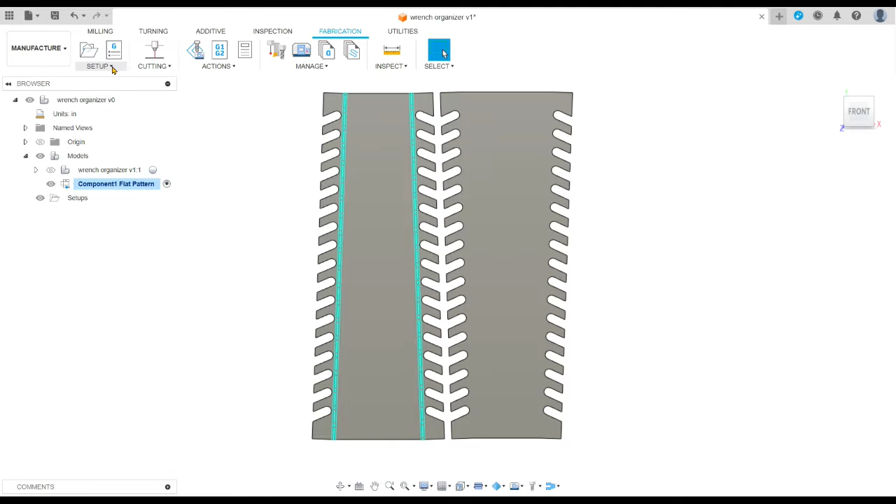You'll left click on setup, go to new setup, and it brings up this box, and you can see the X and the Y, and this is our models. So you want to go down here to where it says model on the right hand side in the dialog box, hit select, and then select both of those models.

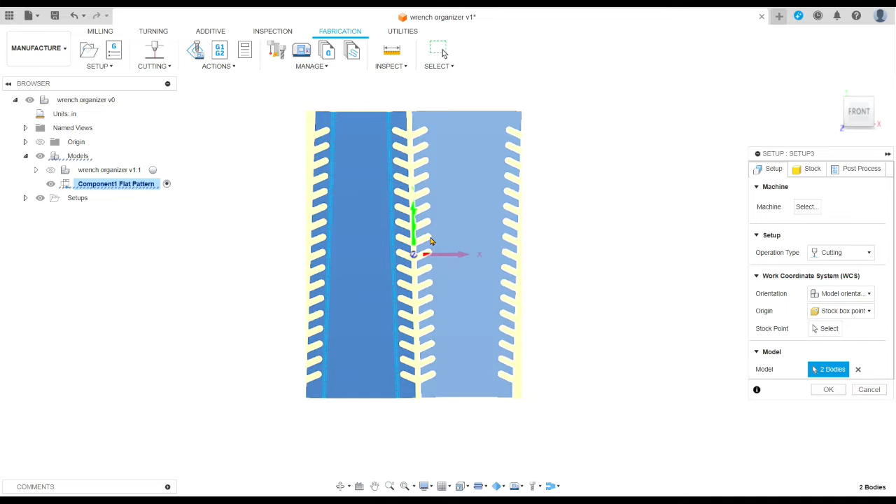And then from there, this is our XYs. Now that is where the tool is going to start, where you set up 0 on your machine for where your cutter starts. And we want that to start on this corner. That's where we like to start. It makes it really easy to manage our material when we start always in the lower left corner. So once we have that set up, we hit OK.

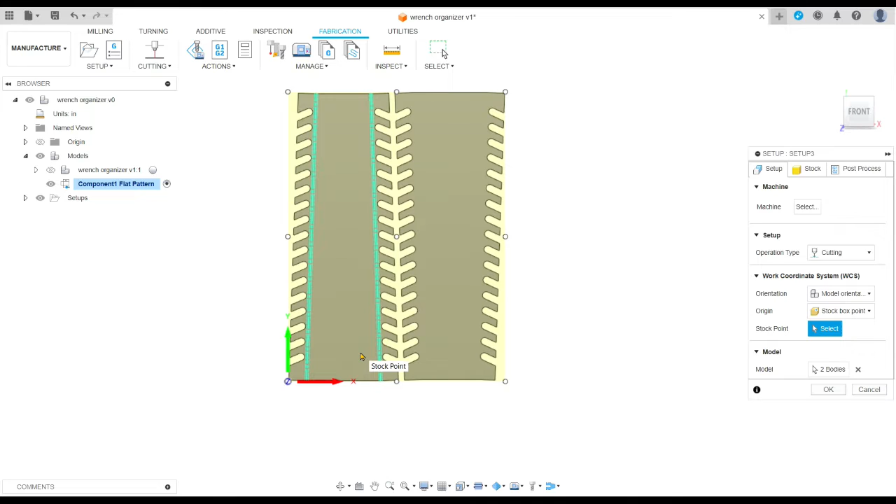And then we go to cutting. We're going to left click on cutting, go to 2D profile, and it'll bring up this dialog box. I'll bring it over here for you. Now here in tool, that's where we want to hit select. Now it's going to bring up this other menu. You can see I already have 14 gauge fine cut selected. I'm just going to go ahead and delete that.

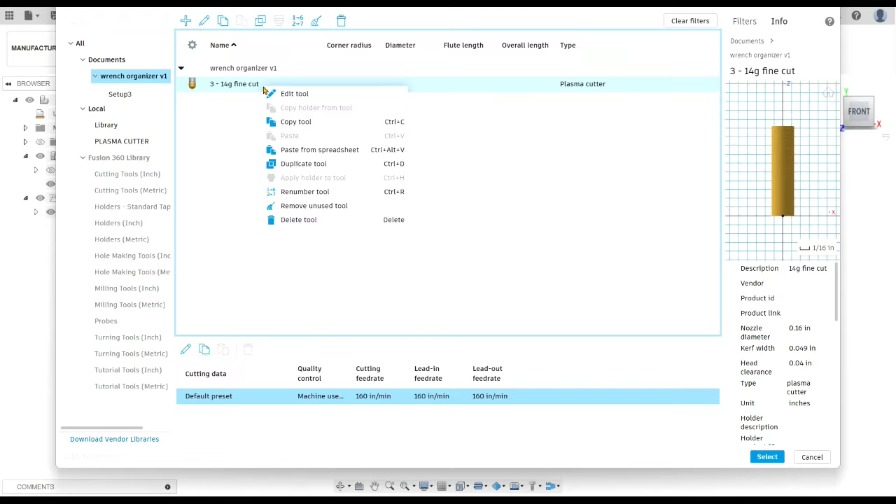Delete. Okay, so over here on the left, you'll see where it says local. You want to right click on local, and it'll say new library, new folder. I want to make a new library, so you left click new library, and then you can name it whatever you want. We'll name this YouTube cutting, enter. Now, we already have our library for plasma cutter, that's ours. But just for the purpose of this video, I'll show you YouTube cutting.

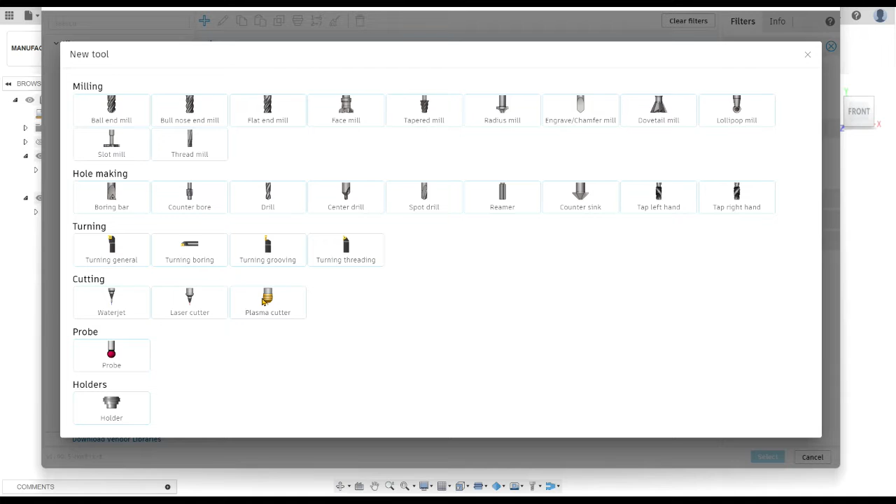So you click on that, you highlight it, and once it's highlighted, you'll see up here this blue plus sign. If you left click on that, it'll bring up new tool, and it'll give you all of these options. We're going to go to cutting, and we'll left click on plasma cutter, and this brings up this. This is where you input all of your information. So the description, we're going to call this 14 gauge fine cut.

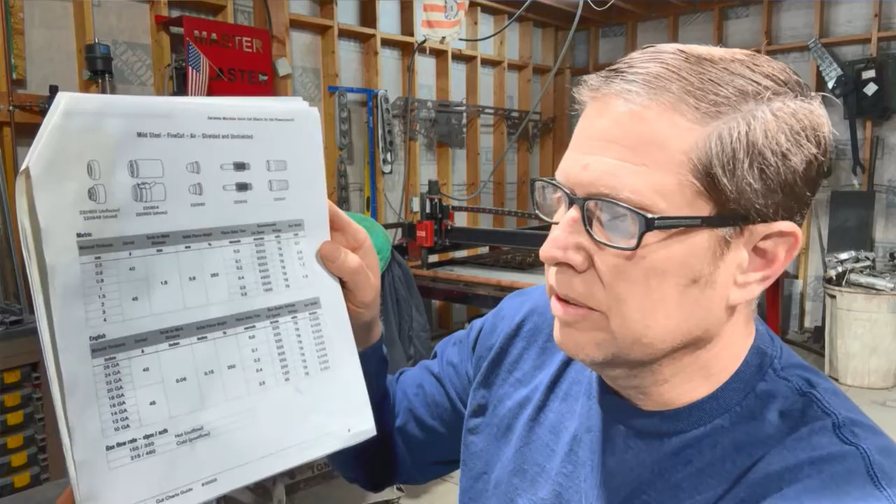And then cutter. Now where you're going to find all this information is from your cut sheets. This is our data cut sheet for our machine. We have a Hypertherm 45 XP, and this is where you're going to find all the information. So I'm just taking this information and inputting it into this dialog box. So cutter, nozzle diameter, we don't care about that. Kerf width, our kerf width for 14 gauge is 0.049. Again, your information might be different depending on your plasma cutter, your machine.

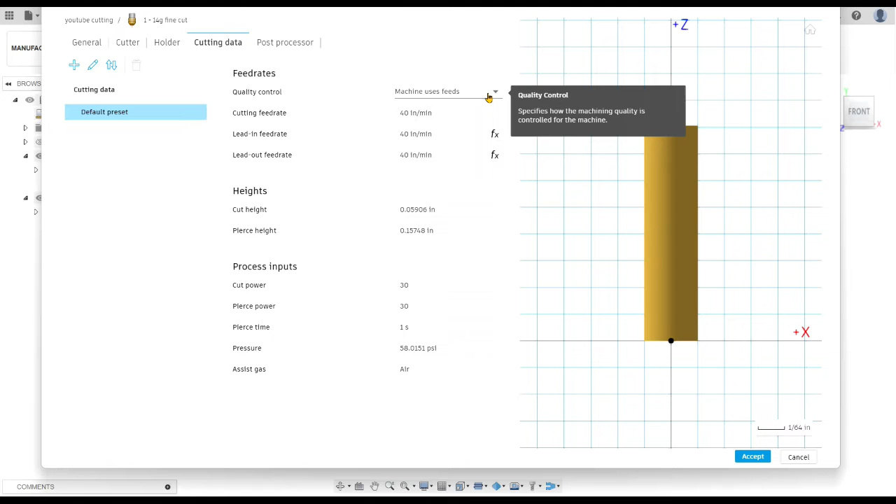And then cutter, so we enter the kerf width. Holder, we don't care about that. Cutting data. So quality control, machine uses feeds, that's what we select for our machine. The cutting rate is 160 inches per minute for us. The cut height, 0.06. Pierce height is 0.15. Our cut power is 45. Pierce power, 45. You're just going to go down the list.

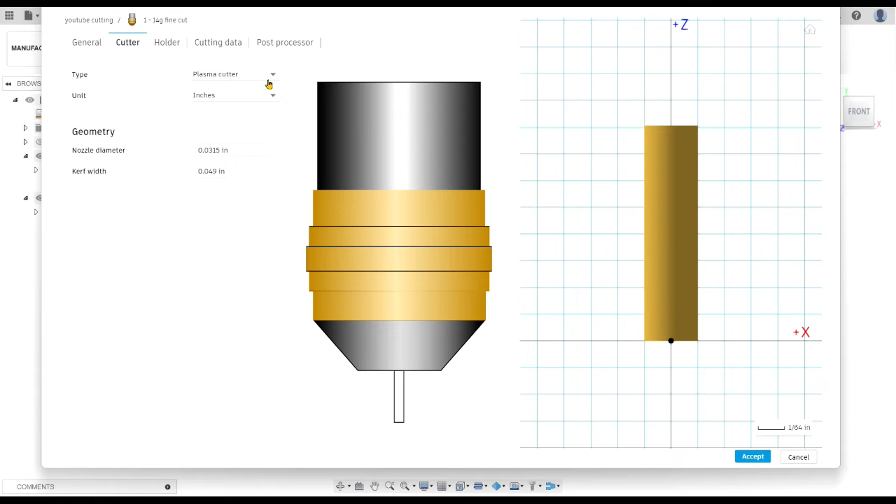Pierce time, 0.04 seconds. That's what we found works really good for us. The air pressure that we run is 80. And it's air gas. So when all of that information is done, you have your description, the cutter, which is your kerf width, plasma cutter in inches, the cutting data, that's going to be your inches per minute, and your cut height. Then when all that's done, you hit accept down on the lower right.

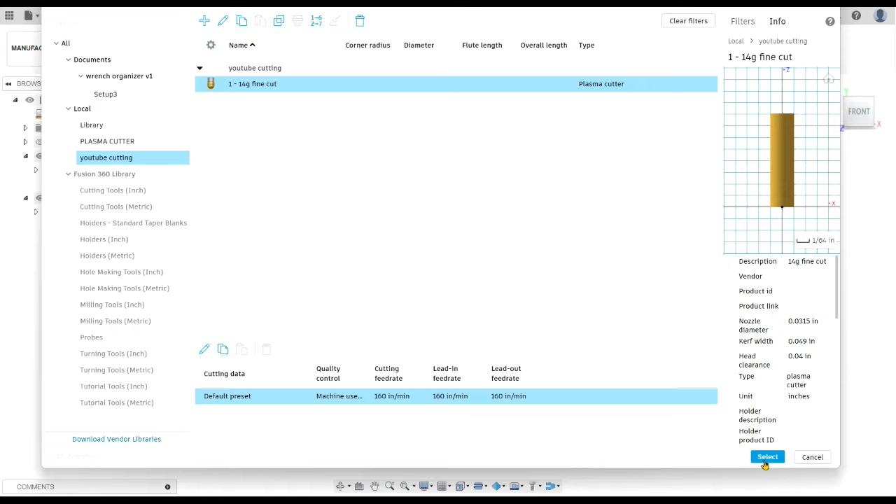Now you'll see it's already highlighted here, 14 gauge fine cut. So then you hit down here on the right lower, you hit select. Now that's going to bring up this tool in your tool section. And you can see it's plasma cutter, 14 gauge fine cut. Perfect, that's what we want. That's how you add a tool in Fusion 360.

You can go through with your cut data and add every tool that you think that you might need to use for your machine, and you can go ahead and create that entire library. So next time you have something you need to cut, that information will already be there. Or you can add it as you go, your choice.

So back to finishing this, we're going to go to geometry. So the first box was tool, the next box to the right is geometry. We'll click that. Now we're going to cut this entire part. So I'm just going to select this one, and I'm going to select this one. Heights, we don't care about that.

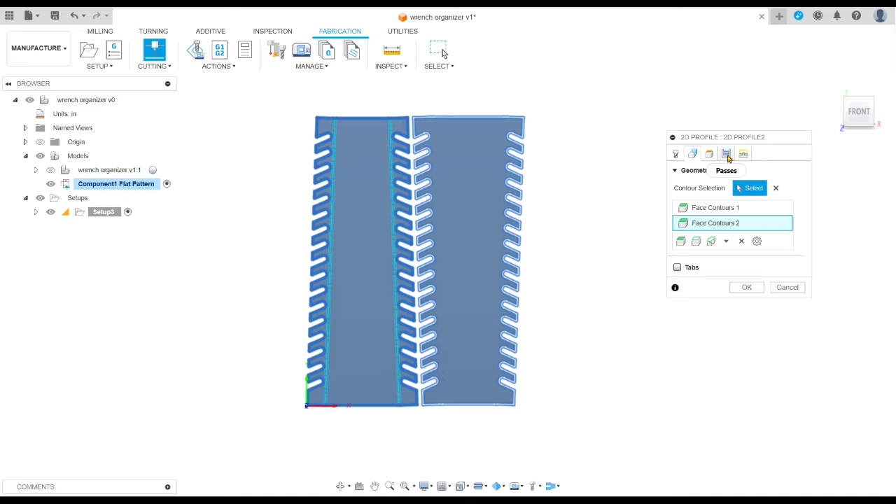Passes. On passes, we don't care about any of this, but you can go down here to smoothing and make sure you click smoothing. That's going to take out any unnecessary nodes that might be in the drawing code that the computer doesn't need.

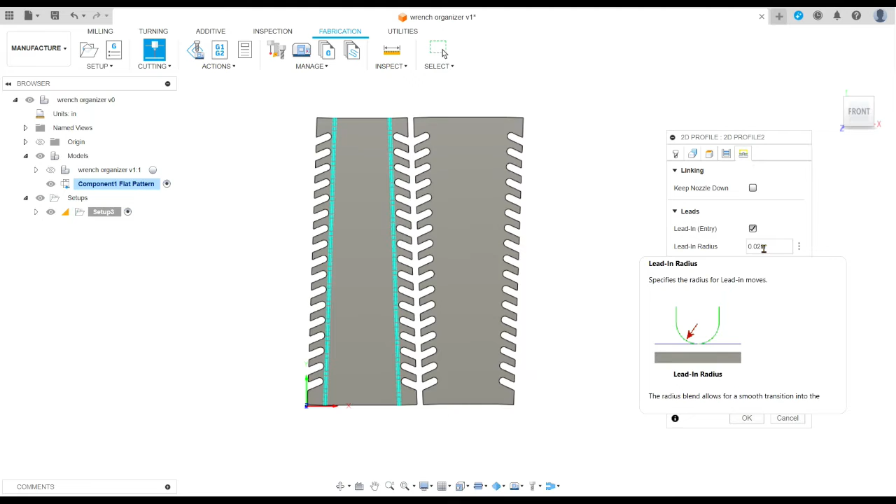So the next important thing is you go to linking, and we're going to hit linking, and our lead in and lead out. Now you can mess with these, especially if you're going to do circles or holes. You can change this lead in sweep angle, lead in radius. We're going to put 0.02, and as you can see here, that's going to add a little sweep to the lead in and the lead out. All of this looks good.

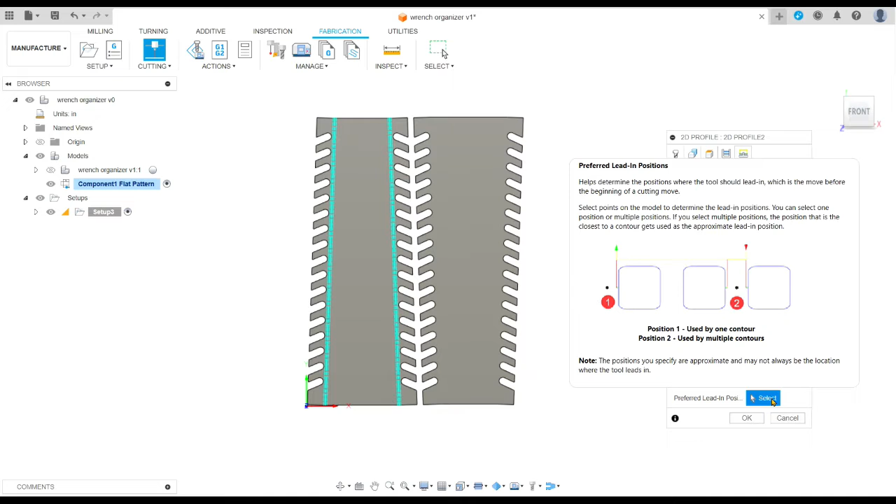So one question we had was positions. If you want a specific place for your tool to start on each one of these cuts, you can tell it to. So we're here, preferred lead in positions. Sorry, I can't speak. We're going to click on that, and then we want it to lead in. Let's see. We'll lead in here, and on this one we'll lead in there. And then once all that's checked, you hit OK.

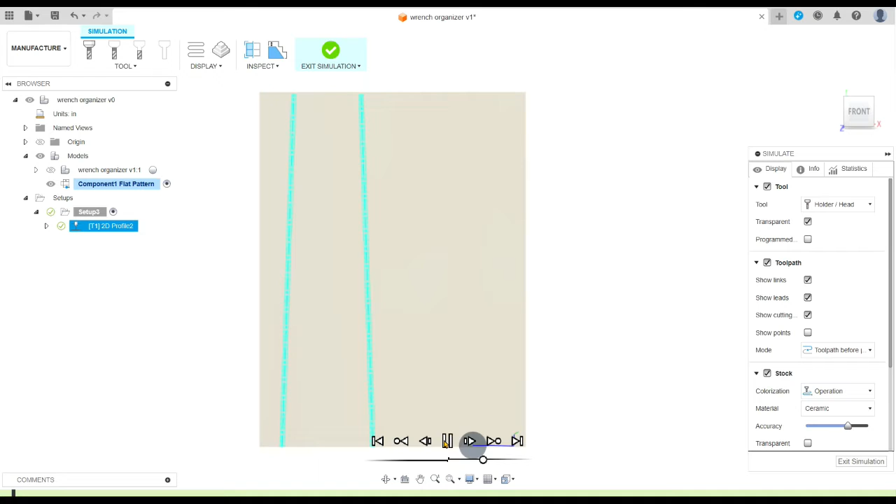The computer will think, it'll go through, and now it's created the cut. Now to check your cut, go up here to cutting, or you can go down here, right click 2D profile, you'll click simulate, and hit play. This is where you can speed it up a little bit. And as you can see, it started and ended each cut right where you told it to. All that looks good. It captured all of our geometry, so we're going to exit simulation.

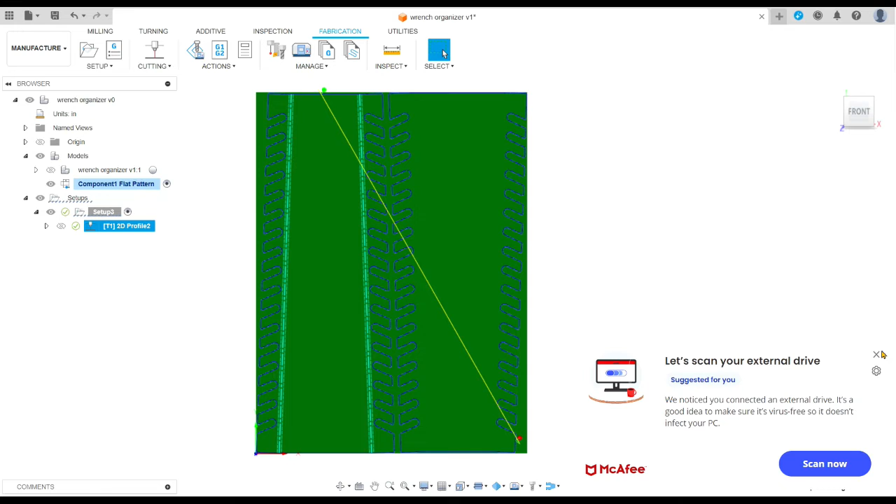Jeez. This is where we get into the post-processing. No, thank you. So our post-processing file, we'll go here. So go back to 2D profile, right click, go up to post-process, and it'll bring up this box. Name, number, this is what we're going to call it. Whatever you want to call it, this is what's going to be written onto your jump drive. So name it something that you will recognize. So we're going to call this wrench organizer 3.

The post, this is the file that people were questioning. We have a custom Mach 3 post-processing file that we've downloaded into Fusion 360. That file is right here, and as you can see, it's lines and lines of code, and this is what tells Fusion 360 to write the proper code for Mach 3, because that's what we use for our plasma cutters, Mach 3.

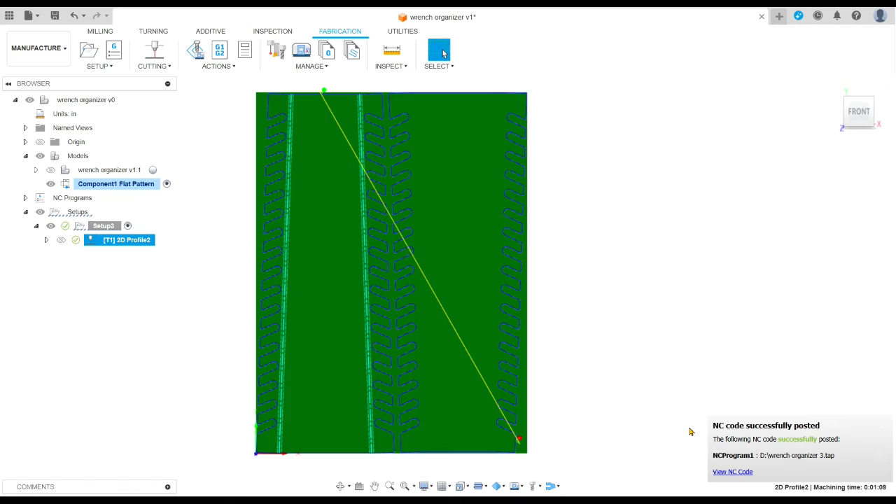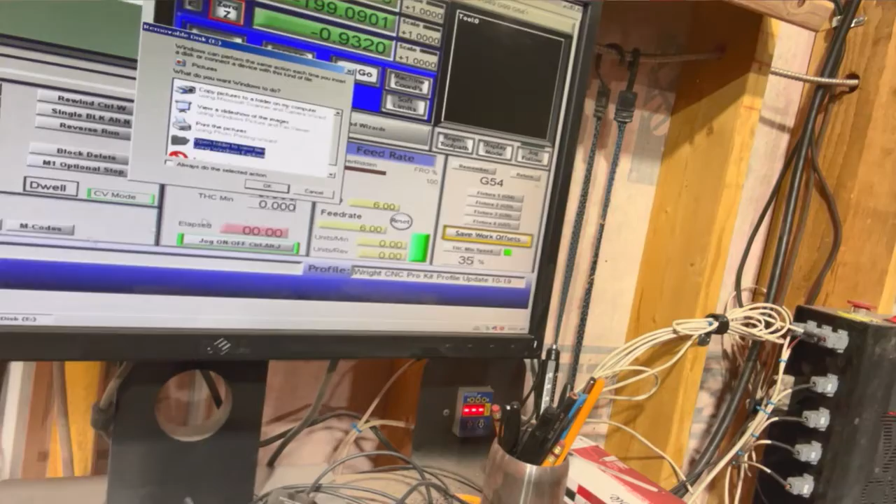Once all that's done, we're posting it to the D drive, which is our USB, and we click post. NC code successfully posted. Okay, so now we're just going to pull the USB drive, come right over here, put it into the computer. There we go. All right, now we're in the computer. You can see Mach 3. Cancel. And we're going to load code. There it is. Wrench organizer 3. Open.

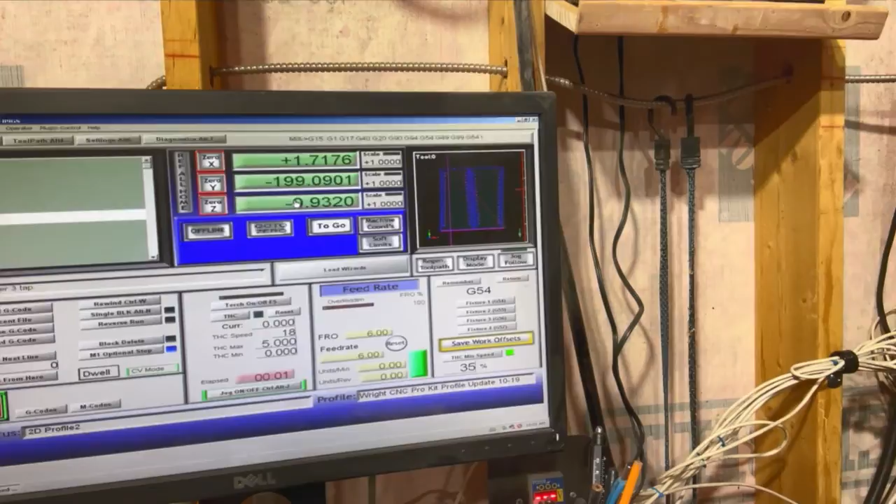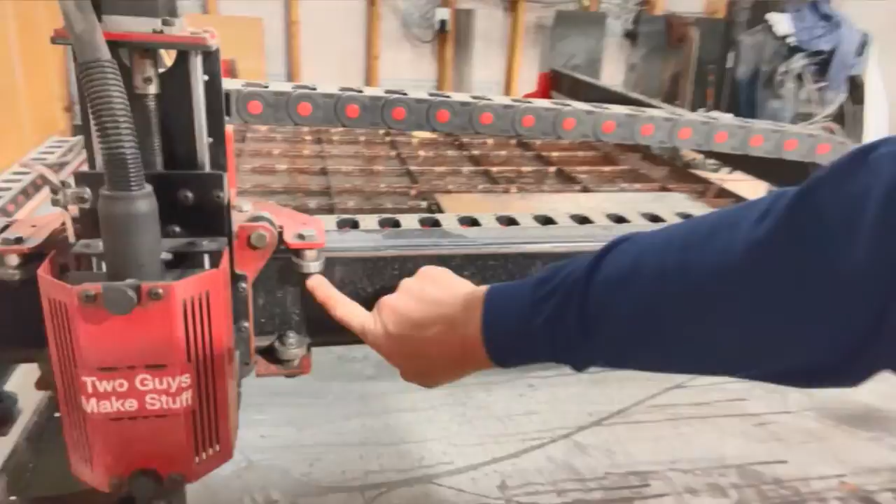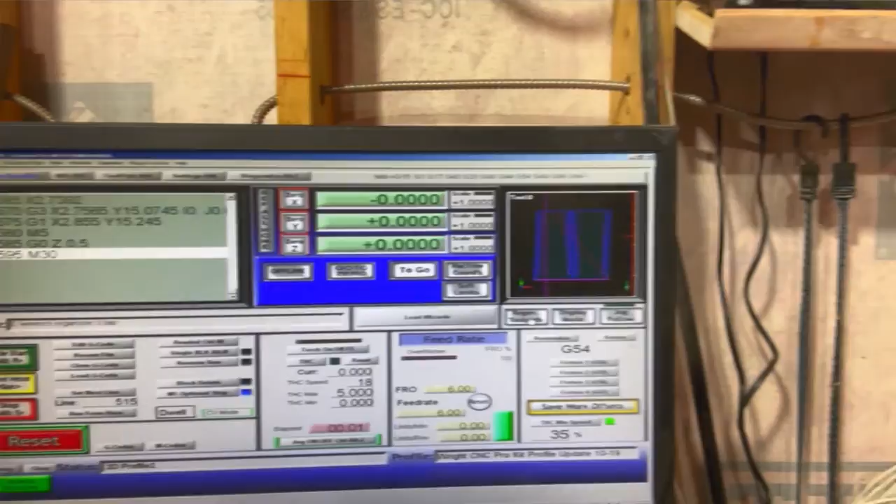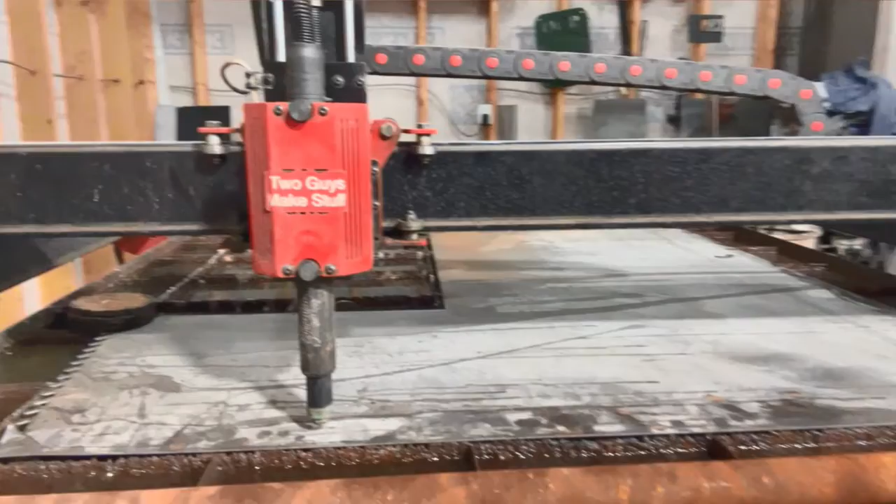You can see it here. This is our X, our Y, and our Z. You can see that they're all these crazy numbers because I just turned on the machine. But this is where we're going to put 0. That's where we used 0 on the model in the manufacturing part of Fusion. So we set up our tool so it's 0. So all I do now is hit 0, 0, 0, regen toolpath, and then we start our cut. That's going down. It's doing a negative 0.16, and it's doing the touchback.

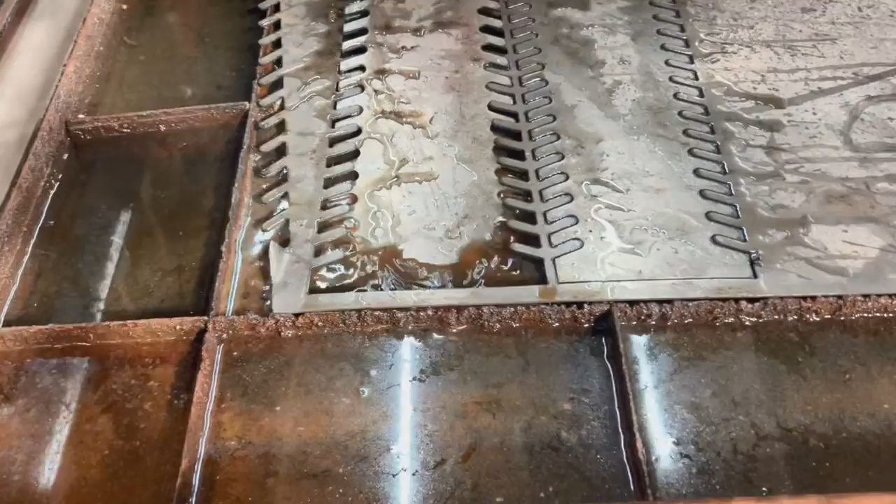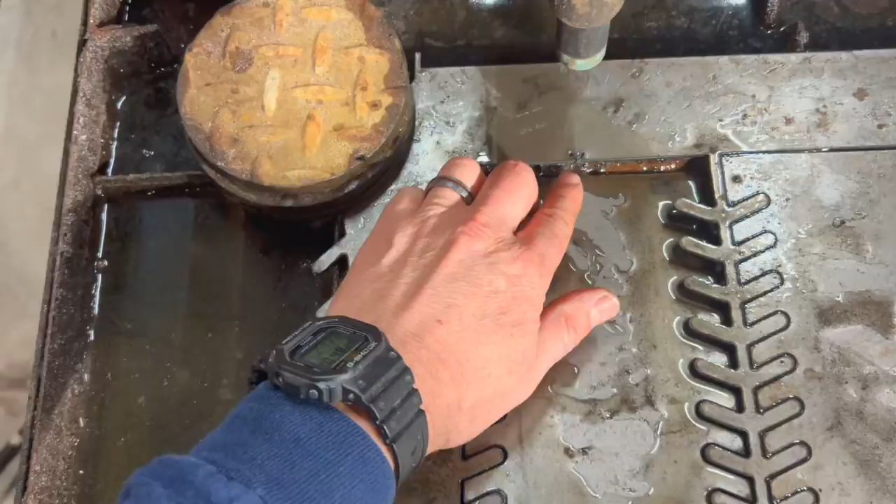Okay, so you can see that's where it did a lead in and lead out, just like we told it to. That piece was our 0. That's where we started it. That's why it works out well for us. It's good for keeping track of material and how we're going to fit it. And there's our 2 pieces. So there you have it. That was a quick video. I hope we were able to explain the post-processing, how to create a tool in Fusion 360 for plasma cutting, how to do a setup, and set it up to do the cut.